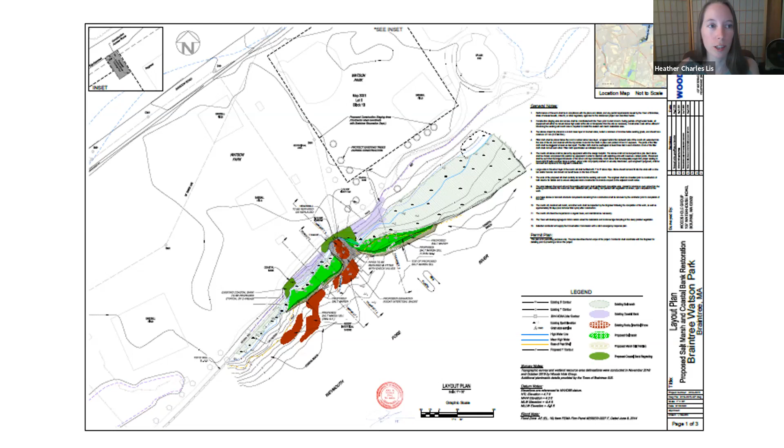I think perhaps we could either go ahead and talk about the decision now, or we could just move forward with the other project. I'm leaning towards continuing with the other project in case anything that comes up during that discussion relates to this earlier project. As the last time, I think there were a couple of comments that sort of overlapped or that triggered our memories to think of something else. So would everyone be okay with moving on to the next discussion? Then we'll come back to a potential decision. Sure. Okay, great. So Elise, if you want to go ahead and go through the changes for the berm project, that would be great.

Great. So there were a few more comments from the commission on this one, so this will take me just a moment longer to go through than it did for the marsh plans. The first comment was that given the hope to remove this berm down the line to allow for sea level rise and salt marsh migration due to climate change to migrate into the park space, that a public education plan should be developed, including markers and signage.

Developing that whole plan is outside of our particular scope right now, but we did add a sentence to the narrative saying that the town is planning to install educational signage to inform park visitors about flood risks, sea level rise, and the long-term plan for the berm removal to encourage salt marsh migration. That was added to the proposed work section of the narrative, so that's page B4. And then note number 8 was added to page 1 of the plans, which states the town will develop signage to inform visitors about flood risk, sea level rise, and long-term plan for berm removal to encourage salt marsh migration. So that was added to both the narrative and the plan.

We had discussed the ability of the park to drain in the event that flooding does overtop the berm during a larger storm. At the August 6th hearing, I mentioned that 1 foot of water covering the entire 18-acre park would take 2 to 2.5 days to drain if the collector pipe was increased from 6 inches as we originally had it designed to 10 inches. After further discussion with the town staff, we actually altered the proposed collector pipe so that rather than feeding into a single one of the existing storm drain pipes from either end of the rain gardens, they actually feed into both of the storm drains, which will make that drainage just a little bit faster again. So the drop inlets are now indicated on the plan, and the detail was revised to indicate a 10-inch collector pipe. So those changes were made.

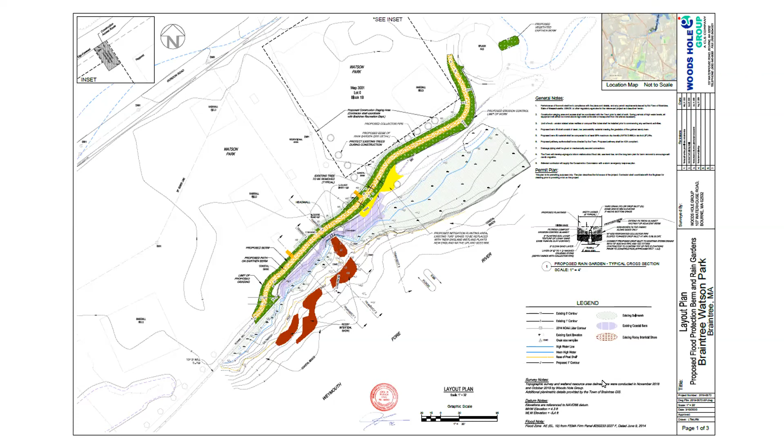Yeah, I think we should talk to them, especially because the area along the wall isn't really part of this project, so they may be taken by surprise if we start kind of taking over the park. Correct. I'd love to do it for that entire area, but in particular for the project area, to talk about maintenance for that. If you wouldn't mind checking with them. We have a standard condition that prohibits pesticides, herbicides, and fertilizers, I think. I don't have it in front of me. There may be some fertilizers allowed, I can't recall offhand, but maybe just check on that, that'd be great.

And Suzanne, the comment about the removal of the berm is noted. That is already in our draft conditions that both you and Robert raised, and I expect that there will be a condition related to removing it. Anyone else from the public wish to comment?

Okay, I had one other comment, which is just that I'm disappointed that shrubs could not be included in the rain garden. I don't fully understand why they would be so difficult to maintain, but I'm respectful of the decision for this project. I don't feel the need to go back and forth with them about it further, but I think it's too bad if there were similar species shrubs. Plenty of other towns maintain shrubs in rain gardens, and maybe it's just that Braintree is not there. I know Braintree is making a lot of fantastic efforts on stormwater. So maybe my comment is more that I hope we get to a place in the future where that sort of maintenance would be feasible.

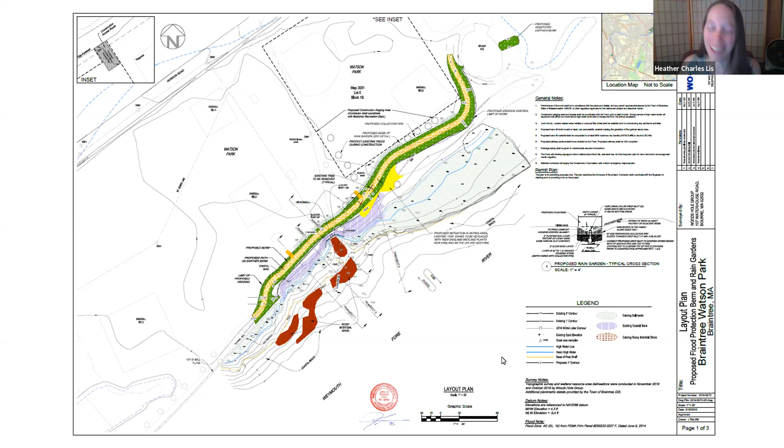Thank you so much. Thank you. Next, we have a public hearing, new hearing for a request for determination of applicability for 131 Messina Woods Drive. The applicant is Kidd, and is the applicant or representative here to talk about the project? Let me just make sure we can hear them. Yes.

Hi, Matt. Yes, can you hear me? Yes, we can. Hi, how are you? Great. Sorry. You can just state your name for the record, and then you can proceed. Just tell us whatever you'd like to about the project.

Sure. So my name is Matt Kidd, and I'm the owner of 131 Messina Woods Drive. The project is that we are looking to put in a pool in the existing lawn area, which falls in the 50-foot range. I actually have our professional wetland scientist with us on this, and so she can go into more of the details on that. But as it relates to any of the specifics around the pool, I'm happy to chime in about that part. So Stacy, are you there? I am. Can you hear me? We can. Yes. Thank you, Stacy.

Okay, great. Thank you. I'm Stacy Minahan. I'm a professional wetland scientist, as Matt noted. And this is a project that actually had been permitted back in 2014. We submitted a request for determination of applicability to put a pool in the backyard and to install a fence. And at the time, the project was begun, but became cost prohibitive. So they did install the fence in the backyard. That was installed in accordance with the conditions. I believe Kelly had come out to inspect the erosion control.

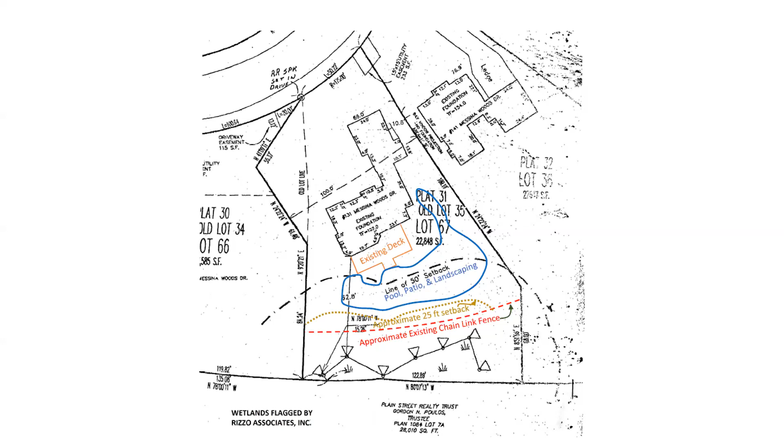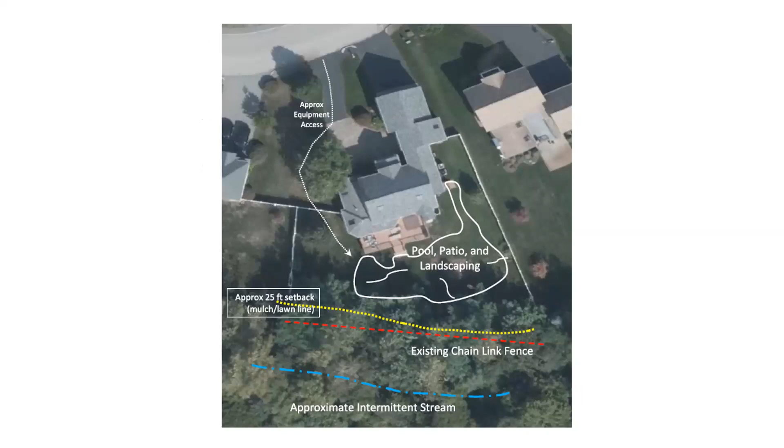It was hand dug. There's essentially an intermittent stream at the rear of their property at the base of a very tall, steep slope. And then at the top of the slope, there's a landscaped area and then the lawn for the property. And so now there's a desire to move forward with the pool project. And unfortunately, the determination has expired since it's been more than 3 years. So we're back before the commission to essentially permit the same project, except that the fence has already been installed. So now it's the pool and the landscaping area within the lawn. I did go out and look at the stream back in 2014, and again this past August in association with the current filing. It's fairly straightforward, I think, but we're happy to answer any questions that you might have.

Okay, great. Thank you to both of you. We have a memo from our staff on this, and there are no issues or questions noted in the memo. Kelly, let us know if you have anything to add. Otherwise, commissioners? No questions here. Okay, anyone else? No, the grass already being there and outside of the 25-foot no disturb area, I don't have any issues beyond the vegetation recommendations that were noted in the memo. Great, thank you, Chris. And thank you, Kim.

And that is my only comment. I wasn't on the commission at the time that the original proposal was approved, but I see no significant issues with the work. But we now do have this buffer zone protection portion of our regulations, and that is in part why you're seeing the suggestion for some native shrubs as mitigation. My only comment would be that recommended condition number 2 says 5 to 6 native shrubs shall be planted, and I would suggest that we change that language to say a minimum of 6 native shrubs. My thought being, not that this would ever happen, I would imagine, but no reason to restrict it to that number if the owner wishes to plant more, but also that it just avoids the ambiguity of the 5 or 6.

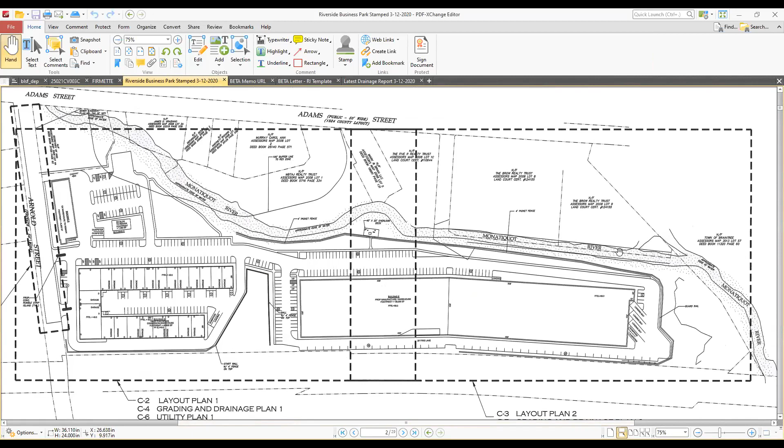And I know some of you that have been on the commission for a while know where we are, what we're talking about. So the Monatiquot River is here, plan north on the upside. Adams Street is up at the top of the page. Arnold Street over here to the left. The existing warehouse or garage is to stay over here, as Attorney Palmucci said. And the other existing building, it looks like a house, but they use it as an office space inside. That's proposed to stay. Then the batch plant is going to be torn down.

And this is the contractor bay that was talked about. It's like a mixed use with garage doors and some office space. And then into the rear of the site is the warehouse space. As Garrett was saying, up here with the parking behind the existing garage area, some public parking, and then access to this walkway. Back here in the middle of the site was what Garrett was talking about with the overlook and some of the picnic tables, to be able to look at the river. That's it overall as far as that goes.

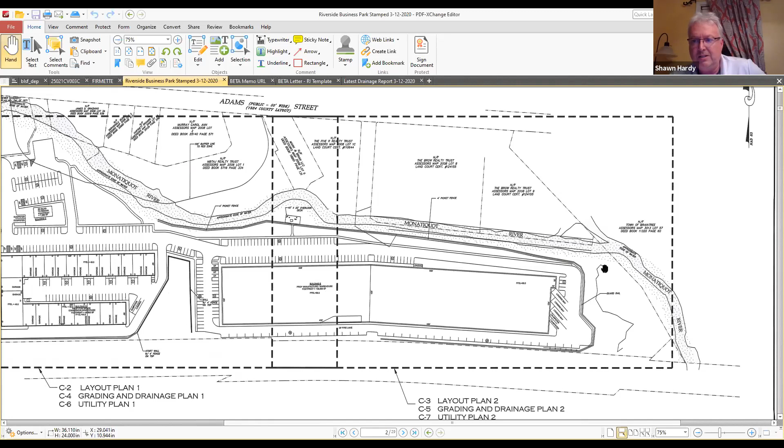Certainly we have grading and drainage plans. It's proposed to collect the surface and the roof runoff and treat it through Stormceptor units and infiltrate, with overflow going to the river. The other, Garrett, I don't have the exact specifics on, but certainly the riverfront restoration is all along this whole area. As you've seen in aerial photos, this place is pretty disturbed. It's got invasives all over the place. So Garrett did a great job with that. I am going to scroll hopefully forward to a grading plan, so bear with me.

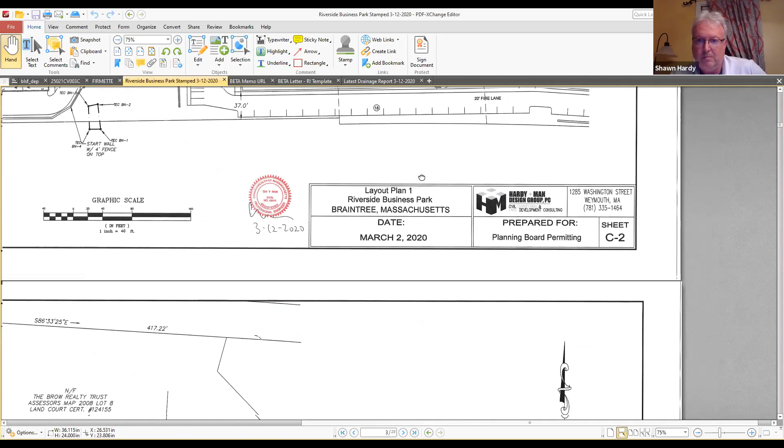So grading and drainage plan, as you all know, this is in the flood zone associated with the Monatiquot. So it had been the subject of a few notices of intent that we've done, back for the original when there was a proposal to tear down the existing batch plant and put in a new state-of-the-art batch plant and the warehouse. The batch plant was never demolished and the new batch plant wasn't constructed, but this garage was. So this was the subject of a more recent notice of intent, after the ANRAD, when we established what the floodplain was and what the wetland line was.

Garrett had filed that and got that approved. Out of that came the realization that while that garage was built, the compensatory flood storage that was required as part of that project was not built. So a notice of intent was filed at that time and showed compensatory storage in order to hopefully bring that into compliance. That also was not constructed because George took ownership of the project. So in this filing, we are proposing similar. Through the ANRAD, we are filling in the flood zone and we are proposing to compensate for that.

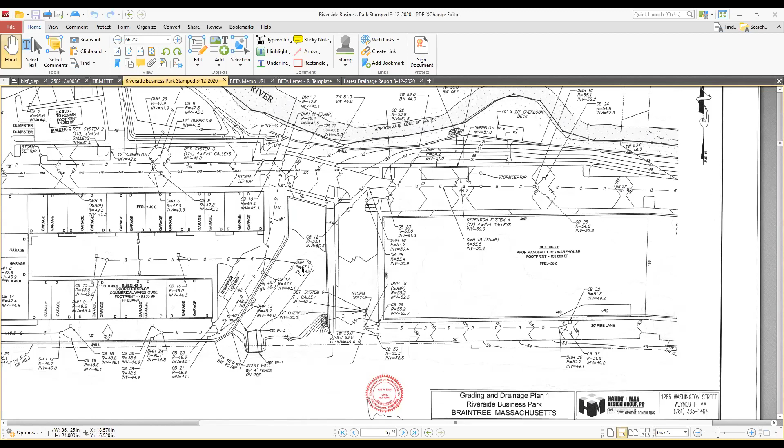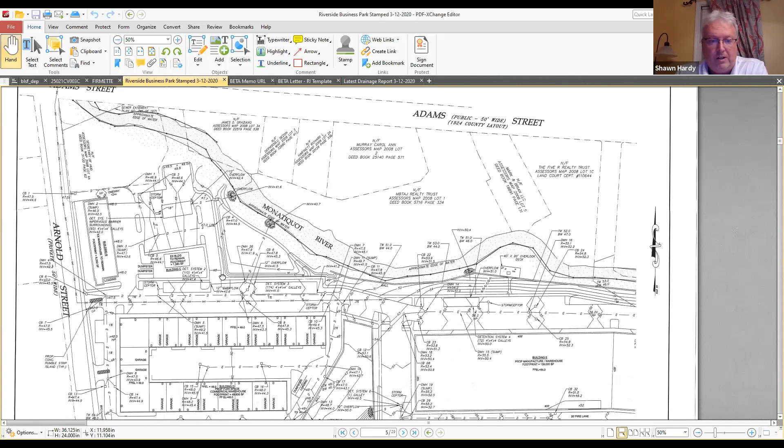One issue is the flood zone or the compensatory storage. And to the point that I know, and Garrett can probably step in again, when we filed this with the DEP, we had brought attention to the fact that there was potentially a conflict between our interpretation and the peer review's interpretation of the compensatory flood storage issue. And we asked them to take special note of that. And when they issued the file number, they did not call that out as being an issue. So they did not comment on that. I don't know whether silence is in agreement with us or not, but I just make note of that.

I will say that we also had a Zoom call and follow-up memo from the peer review, who I know is on here and is probably going to be speaking after us. But I based my compensatory flood storage calculations on what we had done previously through the previous submittals and approvals, as well as guidance on a DEP document from a seminar from 2017 to the Mass Association of Conservation Commissioners.

As you remember, the flood zone is staggered on this. It ranges from way down here to the east of the site at about elevation 41, stays consistent till around the middle. It jumps to elevation 45, and then it graduates up to about 48, where Adams Street meets Arnold Street. My compensatory storage is in this area here, where according to that flood profile is at about approximate base flood elevation 46. I base that on the requirement of the storage being hydraulically connected to the river as well as in the same reach. And if I may share that, I have that as well.

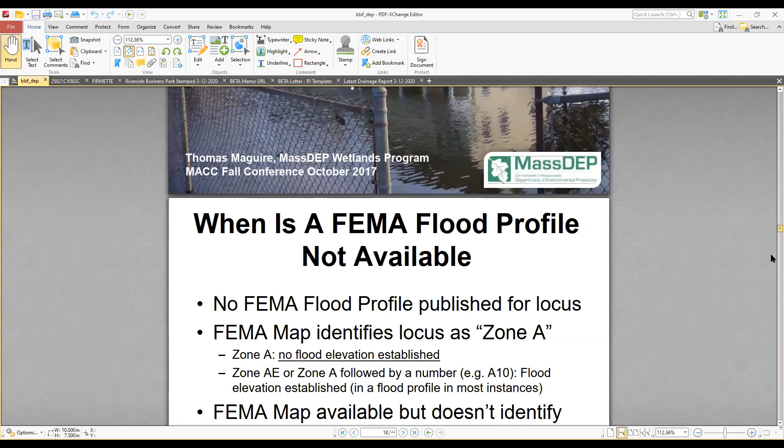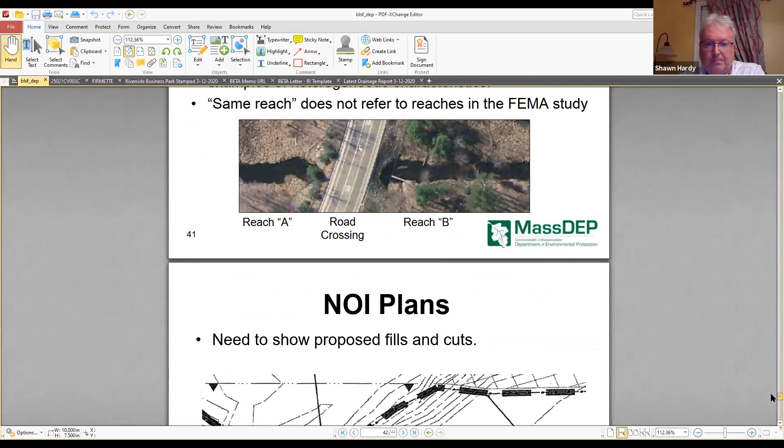This is that study from the Mass DEP. I can scroll up to the cover page so you guys can see what it is. So Tom Maguire, Mass DEP, Wetlands Program, MACC Fall Conference, October 2017, bordering land subject to flooding, how to determine their extent and meet performance standards. There's a lot of how to read flood maps and whatnot. But then down here, for the performance standards, I'm gonna find my page again. 41. There it is.

Okay. So it says same reach. Reach is not defined in the wetlands regulations, but the same reach is a length of stream located between two confluences, two culverts, or two road crossings, provided the characteristics are homogeneous. And they show in the picture here, reach A is what's above this roadway crossing, and reach B is what's below that roadway crossing. They say a uniform cross section, similar elevation, same slope are examples of homogeneous characteristics. Same reach does not refer to reaches in the FEMA study. So that seems to indicate exactly what our site is.

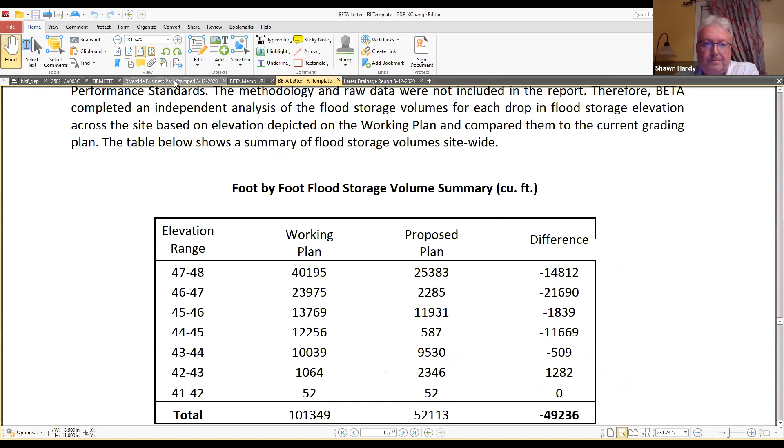Again, I can show other states have similar guidance and similar things. One that was of interest, and I know Rhode Island is not Massachusetts, but they had done the same thing. They went so far as to show that same exact FEMA map and call it out specifically because it was between two roadways and things like that. So

What I'm basically saying is I think overall our plans are ready to be revised, barring major questions from this commission, basically in line with what the peer review had asked as far as the stormwater goes. But we are asking the commission to weigh in on how to interpret this base flood elevation and this compensatory storage, because it's a pretty important issue, both as far as the performance standards go and the environment, but as far as the project goes,

if what the peer review is asking us to do is what the commission directs us to do, then I guess the change will be this area here that is currently proposed as compensatory flood storage will certainly have to be altered. It will come up this direction towards Adams Street. It will further go into an area that has been shown to have contaminated soil. It will probably impact the location of the Riverwalk as well as the public parking, because that is the area that is the 48s and the 47s for elevation.

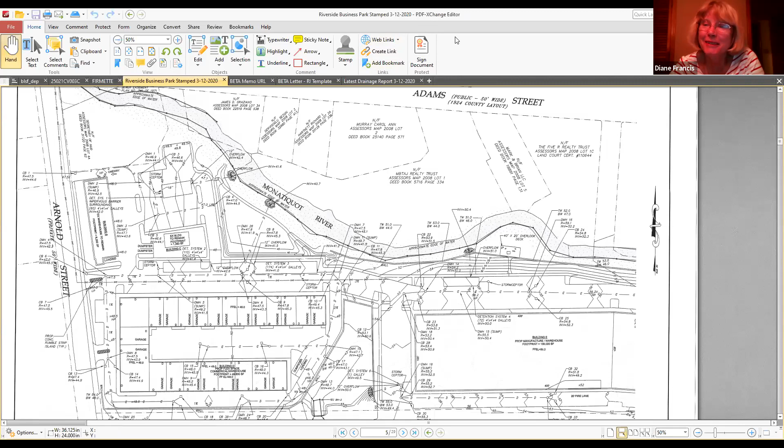So if I may, I have a couple plans we can share to give you a better understanding of our strategies for the site remediations. Stephen, will you let Chi-Man share his screen?

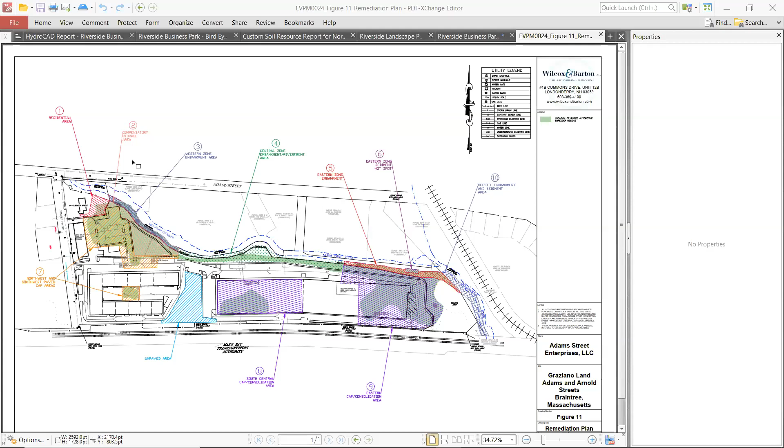So here on the screen, what we have shows, along the bank here, the red hatch area is pretty much the area we have to remediate. It's an area behind the existing two-family house that's going to remain. Our strategy is to try not to disturb that area as much as possible, and not to open up the ground that much. Keep that soil on site, especially close to the bank, and so whatever we come up with in the soil remediations, we are relocating within the site into some consolidation area.

Some of it is going to be capped under the building, where the purple hatch area is. And then the proposed compensatory storage area would be soil cover in compliance with DEP regulations. So if we have to do the so-called compensatory storage area behind the two-family house here, we feel that there will be a lot more disturbance of the soil, and the close proximity to the two-family house, rather than the open area that's commercial use. That's one of the reasons we want to design the compensatory storage area further away from the two-family house.

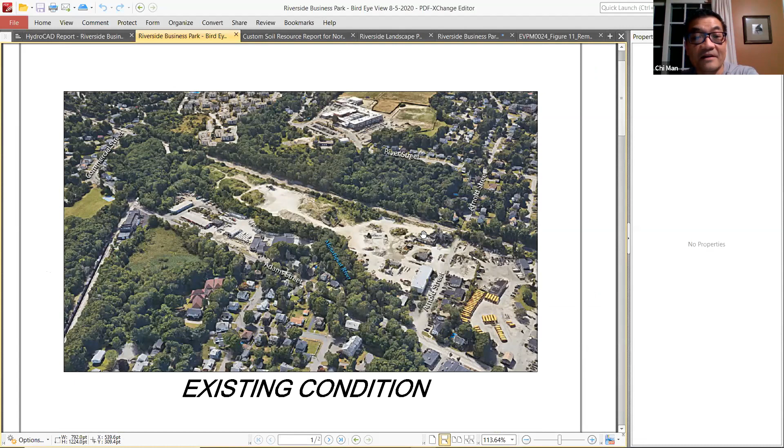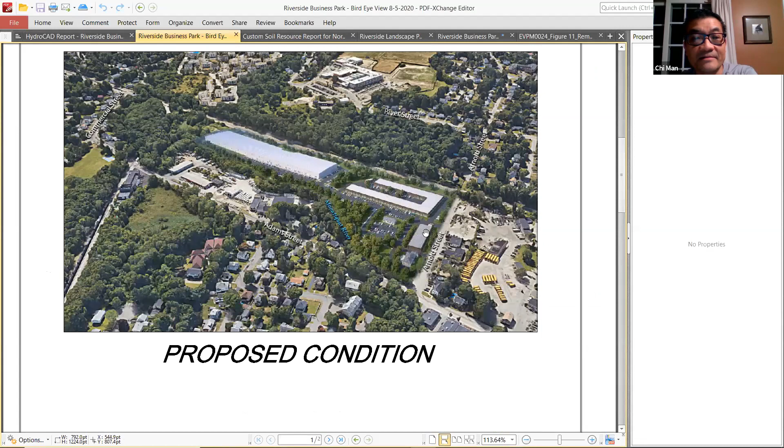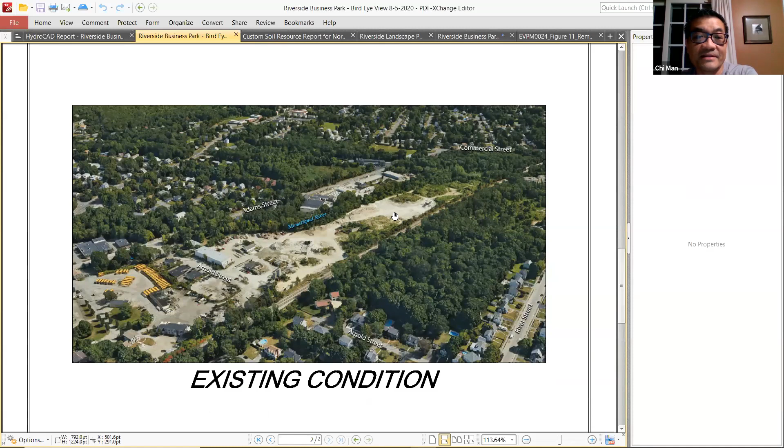Other than that, I have some existing conditions of the site to share. This is how the site looks today. As Garrett described, it's heavily disturbed. And we have a rendering showing what the site would look like with the restoration and landscaping and the new building; it's going to be a 100% improvement. And a different angle looking at the site. If you're not familiar with the site, the existing warehouse, the batch plant here, and pretty much you can see the whole entire site has been disturbed. And this is just another rendering of the proposed conditions of the finished project.

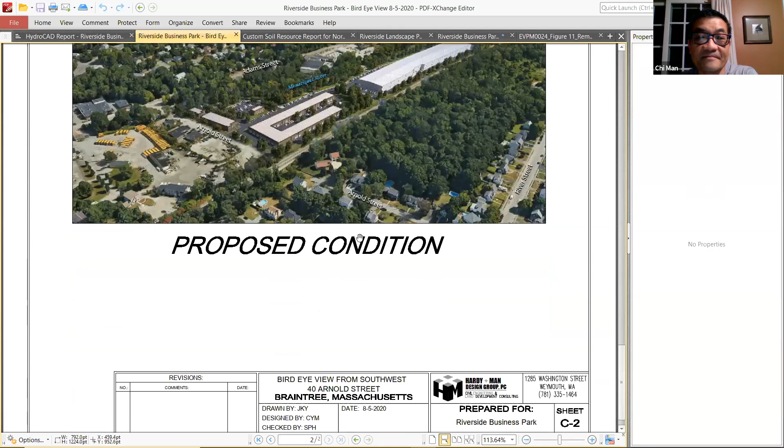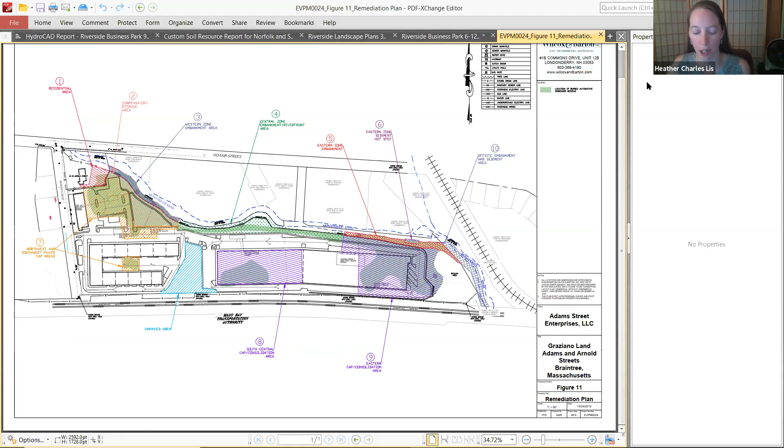So I guess we are open to the commission for any comments or questions. Okay, thank you very much to the team for the comprehensive overview of the project. We appreciate it. I'd like to let commissioners comment now if you'd like to, but I also want to acknowledge that we have the peer review team, or at least some staff who conducted the peer review from Beta, on the line. We could also hear from them first.

Any commissioners have a strong preference? Okay. Vote for the peer reviewer first. Okay, that sounds good to me as well. I just want to make sure. It's been a while without an opportunity to speak, so if you had something burning that you wanted to say now, we'll give you a chance. So I see at least one person from Beta. Yes. Phil Paradis, I'm sorry, I don't know how to say your last name, but if you would like to state your name for the record and share with us whatever you would like to from your review, we would appreciate it.

Excellent. So yes, thanks for the introduction. My name is Phil Paradis with Beta Group. We've been tasked by the Office of Planning and Community Development to review this project on behalf of the town. We developed a peer review letter reviewing the stormwater, the floodplain impacts, and also some environmental considerations relative to the car parts issue. Subsequent to that, as Shawn mentioned, we had a virtual meeting, mostly because we came up with considerably different numbers relative to flood storage and compensation.

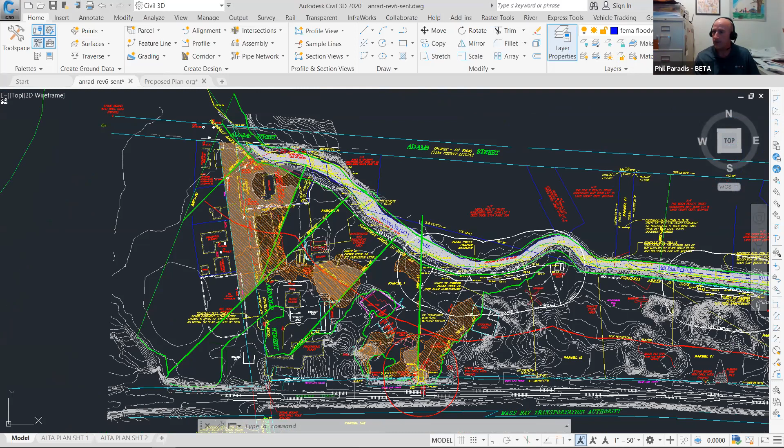All right, so this is a CAD drawing of that plan. Again, the areas that are shaded up here are significant, were filled after 1993 in order to put in the warehouse building here and the road and some of the work associated with the plan.

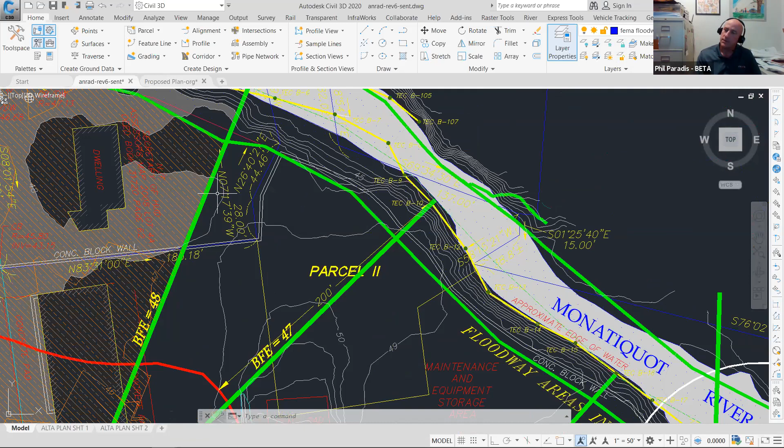There are also spot areas, or no, these are areas that are below the flood elevation, and it's kind of a unique look in that it's stepped. It's not like this is elevation 49 and this is 48, but only this area that's 48 and below was counted as flood storage. So you'll see it stops at the 48 line. So in here, it's above 47 but below 48, and so there's no flood storage here except over here.

And then there's an area in the center of the site. If you've been out there, you remember this area that's kind of low in between the buildings and would be subject to flooding should an event of sizable rainfall occur. And then there's again issues. So anything above 45, if you can see the contour here, 45 is this. So this would be below 45.

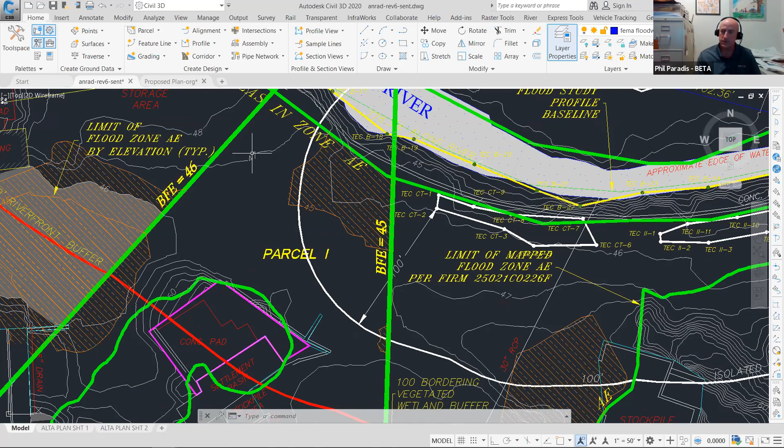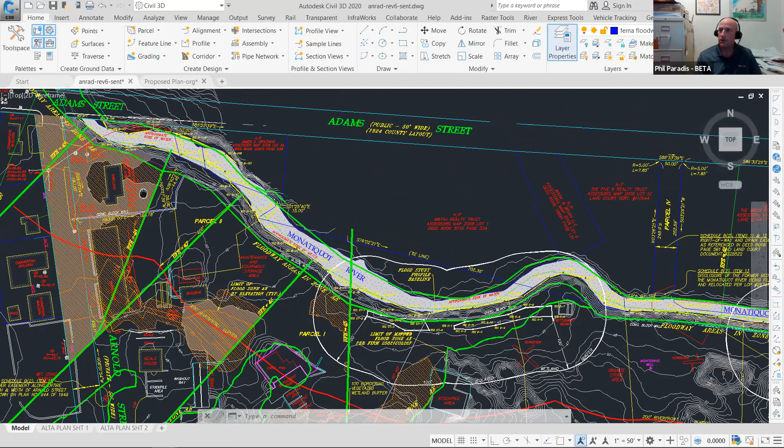This would be the flood storage in this particular reach, and that's how we based our base flood elevation, and you can see again the flood storage area is substantial on the upper end of this project. When you go to look at the proposed, let me see if I can get to the proposed.

So the proposed, can you see that? Oops, what did I just click? I clicked something wrong. All right, where are we? No, that's the old one. Let me get back there. Let me close some of these other ones. What are you seeing now? Are you seeing this plan? We're seeing that it says you've started screen sharing, so perhaps it's just taking a moment. Oh, okay. Or you might still have to choose the screen. Sometimes that's the waiting thing.

All right, let me stop sharing again. It's been working up to this point. It's not showing the right plan though. Let me move this over here. I have two screens. So we're still seeing that you've started screen sharing. All right, now we're not seeing you at all. CAD's locked up. Let me try one other thing. I'll see if I can open the plans.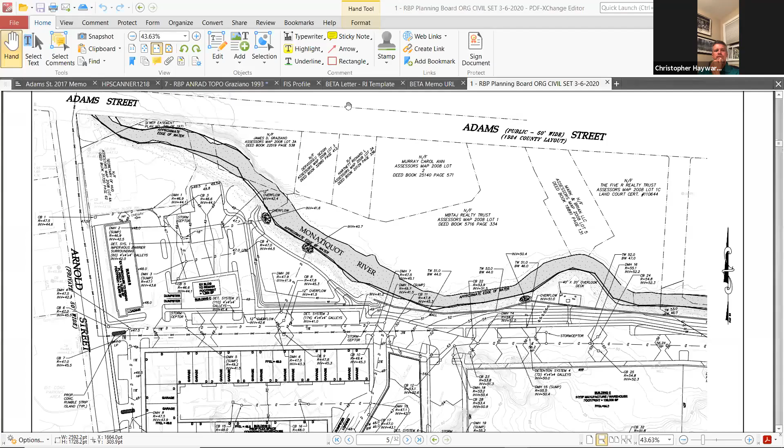By putting the compensation down here on the lower reach, it doesn't really help the flooding up on and across Adams Street. And I understand what Shawn's saying in terms of the reaches. Typically, the culverts or stream crossings are what control the flood elevation. However, as you can see, the 100-year flood drops significantly in a fairly short distance for floodway standards. So this is not really homogeneous.

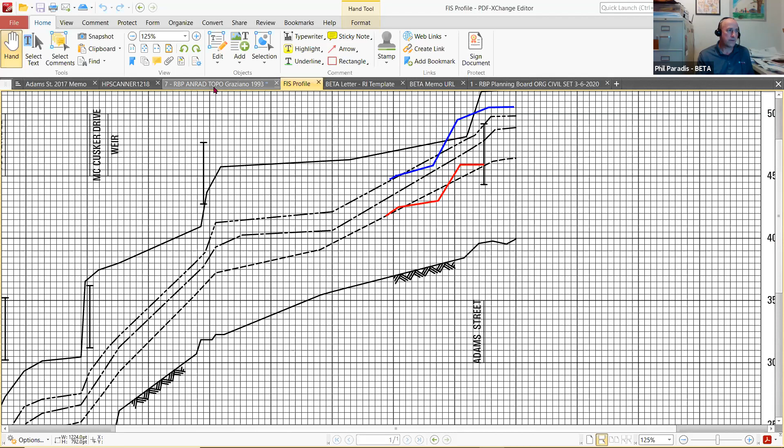to reach impact. We feel that in order for the site to be brought to equilibrium, the flood compensation for this particular area needs to be in this area. And subsequently, as you go down, it needs to be on a foot by foot basis in that particular area because there is such a difference in gradient relative to the floodplain.

If I may, can I? Thank you very much. Can I respond a bit, Madam Chairman? Yes, Shawn, if you want to respond, that's fine. This issue seems significant enough that it's worth talking about it and making a decision tonight.

A couple things, and I've said this a bunch of times: anyone who's seen how this area floods, and that profile with the red and blue lines shown a moment ago indicates it. This area floods because the water cannot get under Adams Street. It comes over the bridge, down Arnold Street and into this site. We talked about this when we filed and got an ANRAD, and that plan with those shaded areas was the basis of the ANRAD.

That came through a lot of meetings with the town engineer at the time, Kelly and myself, and even the profile showed it. The reason that flood profile drops significantly after Adams Street is because Adams Street is the reason that area floods. It can't make it through that culvert. That is a further example of what I showed on that DEP document of what is considered a reach.

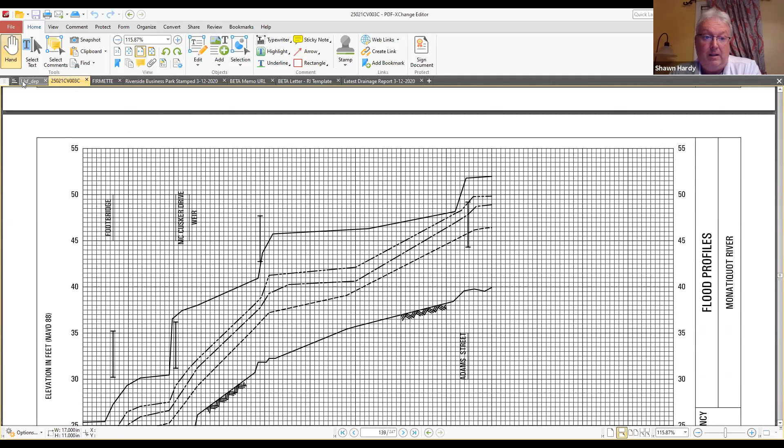And again, this document, the MACC, this is to the Association of Conservation Commissioners. This is telling people in your situations how they're supposed to interpret things and how they're supposed to enforce and make sure the performance standards are being met. Same reach: a length of stream located between two confluences, two culverts, or two road crossings. And here's the picture, reach A, and what divides it is a road crossing, and reach B. Same reach does not refer to reaches in the FEMA study.

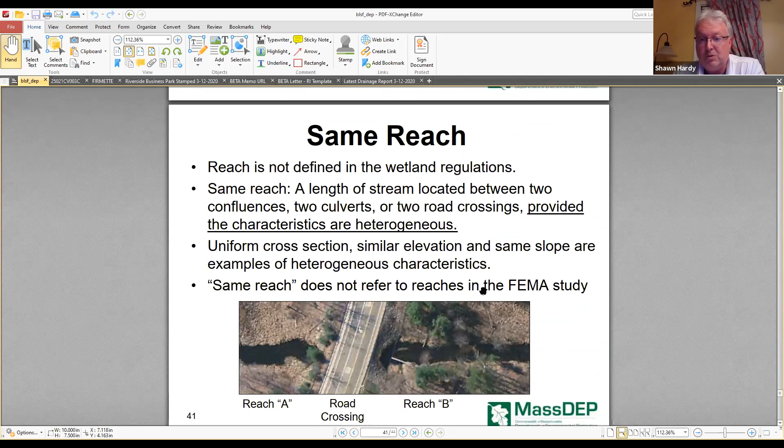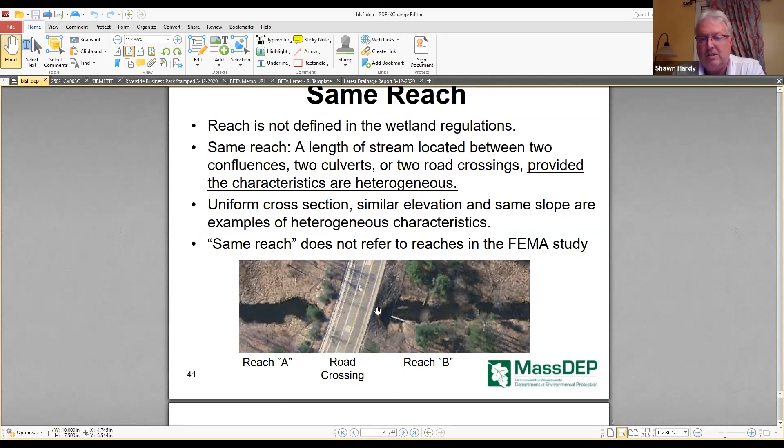So not only does it say what I have shown or what I interpret seems to be correct, it says a reach is not between elevation 45 and 46 and 46 and 47. It gives a picture that says my interpretation meets this document, and then it goes so far as to say that it does not mean those separations between those base flood elevations that were previously discussed. It specifically says not refer to reaches in the FEMA study.

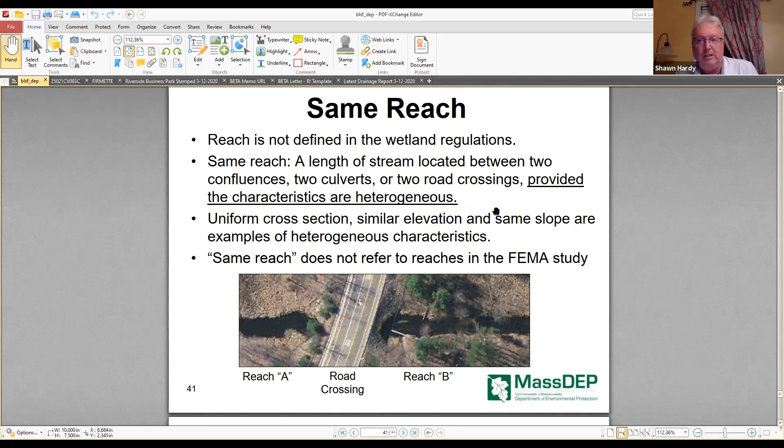So between that and what has been previously approved by this commission, and again, you guys I know have history, you've certainly been out here probably, and anyone with DPW, and I know Kelly's been around long enough to know when this thing floods, we've seen it. It comes over Adams Street, it comes down Arnold Street, it swoops through the property of Graziano, and then it gets back as fast as it can to the river.

So that's why I feel what we've shown is both consistent with DEP, the only guidance document I could find, but it's also consistent with what has been previously approved, as well as what anyone who's witnessed flooding knows of how this occurs. So that's why I'm asking your guidance, but I'm strongly suggesting that what we have shown meets the criteria. Thank you very much, Shawn.

I'd like to let the commission discuss this issue now. However, Phil, would you mind just very briefly telling us what the two colored lines were on the flood profile that you showed us, just to clarify, since that question came up? So, yes, let me share this.

So the challenge is it's not easy to depict it on a profile. But what Shawn said is the truth in terms of this river floodway, is that it comes over the bridge, comes over the road, and wants to get back into the river. However, because they've filled this upper reach, there's less opportunity for the floodway to spread out and then get back into the river at this elevation. So filling this up here further restricts the flow from this upgradient area.

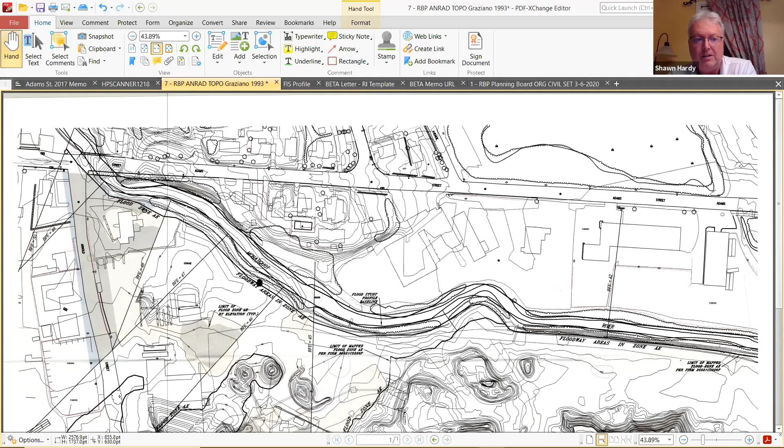That plan is not showing what has been filled. That's the basis. Excuse me. So I think maybe at this point, obviously there's different opinions. That's not even an opinion. He's showing the plan. I'm talking about general hydrologic and river characteristics. Yeah, but you pointed to the ANRAD plan and said that area has been filled. It hasn't been filled. That plan that you're showing is the basis of the ANRAD plan that shows what is the flood zone. Yeah, and anything that's been filled, this is filled now. Okay, that may or may not be.

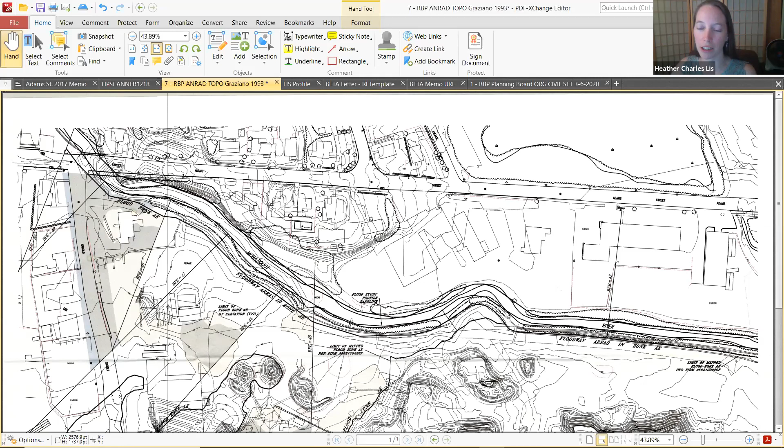I'm going to actually cut in here at this point. I really appreciate all the effort on the whole project, but this specific topic, I know this is not easy, and I know there are differing opinions. I think the commission should talk about it and see if we can come to some agreement ourselves on how we feel it makes sense to move forward. There's been fill all over the site, but I recognize that as the ANRAD plan, and I can comment on that as well because I was on the commission when that was approved. But I just want to open it to the Conservation Commission. If anyone would like to comment, maybe we could keep our comments initially focused on the resource areas and in particular this floodplain issue, and then go from there.

Does anyone want to dive in first, or do you want me to state my opinion? I'll step in. Okay, Peter. I'm not as familiar with this site, but from the plans, is all the project site located within a base flood elevation flood zone? The short answer is no, but I'll let Shawn or somebody from the team answer the question. Well, it seems that the limit of the floodplain is not clearly shown in the plan, and that definitely has to be addressed. My next question would be, what is the limit of the floodway on the site? I don't believe that that's shown on the plan either, but Shawn, I'll let you respond.

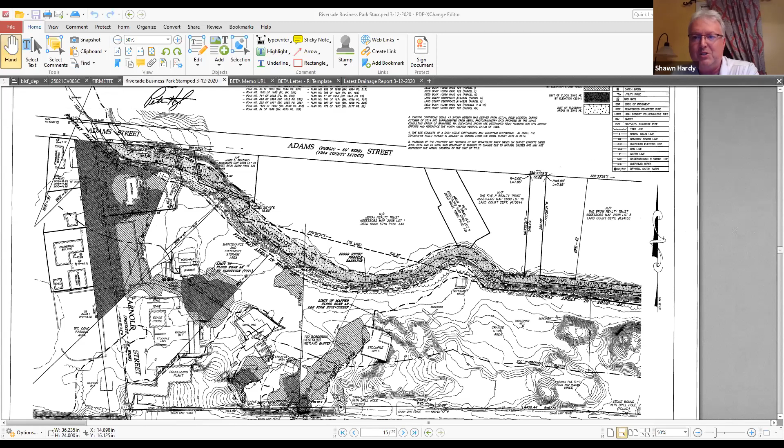So again, this ANRAD plan went through 6 revisions. These lines with these base flood elevations on them are what FEMA has shaded on their flood map. But these shaded areas are the only areas on this site that fall below those base flood elevations. Therefore, they are the only areas that are in an area subject to flooding.

I'm going to provide some comment here. Peter, if you're surprised by what this floodplain looks like, that's perfectly understandable. It's a very strange looking floodplain. I was on the commission when this ANRAD came through, and it was very tricky. It doesn't follow the mapped FEMA floodplain, but that was intentional. We requested that the floodplain should be shown based on actual surveyed elevations. But that was very complicated on this site because it is a site where stockpiles and materials are constantly being moved and graded and regraded.

And so, past plans were looked at. There was a lot of other data that came into play, and it did get very complicated. But I concur that this is what was determined as being the floodplain. Now, that ORAD issued by the commission has expired earlier this spring. So in theory, that could be revisited. I will say that I don't have an issue with how the floodplain or the other resource areas are being portrayed. Kelly and Garrett have reviewed them together, and she's comfortable with it.

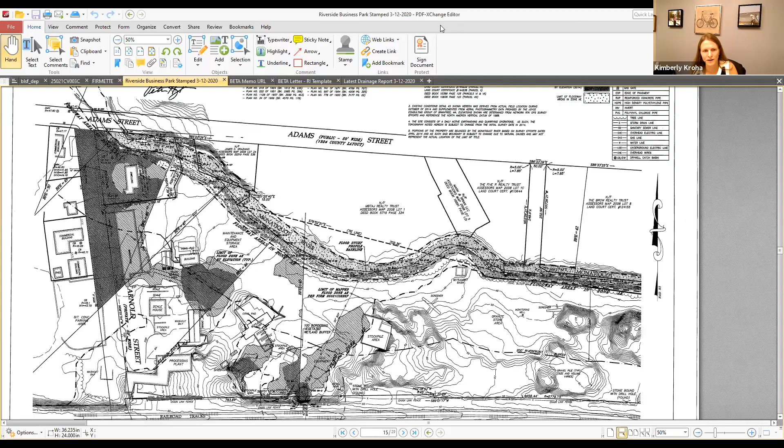I had a couple questions. So I understand from some of the information that there was flood storage that was supposed to be put in 2005, or I shouldn't say it that way, and then the NOI in 2017 called for it, and it wasn't included, and that appears to be the problem area. And I was just wondering if somebody could point out where that was supposed to go, and if that's a location that's still a possibility, or is that something changed with that aspect?

There's also, sort of together with that question, the house that's up above, what is it, Building B, and whether or not, it looks to me like that's not part of the property, but there seems to be a lot of talk about the house and the land there. And so I'm not sure how that connects with what's being proposed here, or if it was part of the property previously, and that's why there's a lot of discussion about it.

I can address the member's question about the two-family house. It's all commonly owned. They were all separate parcels. They still are. The entire site has been combined, but it was originally many separate parcels. The house is not part of the proposal in terms of everything that we submitted before the bodies.

However, if the interpretation of the commission is that the compensatory storage needs to be done in conformance with the peer review's opinion, we're going to need to add in that particular property, because we would need to grade that area. So we would have to amend our applications to include that. But it was cleaner if we didn't include that property with everything else that was going on. That's the short answer as to why it's not in there, but why it's being discussed.

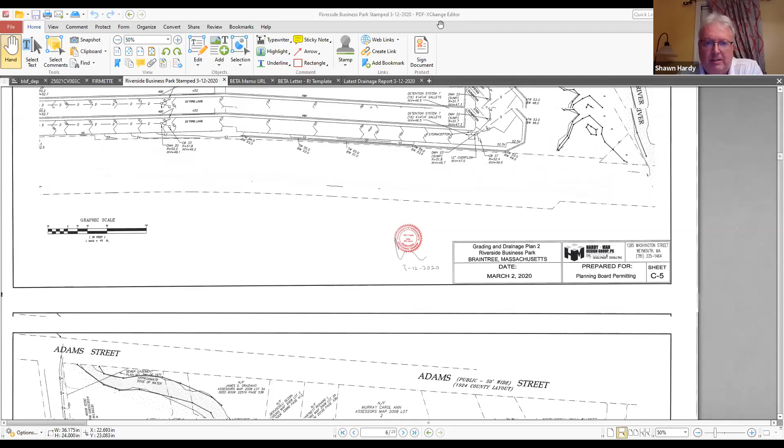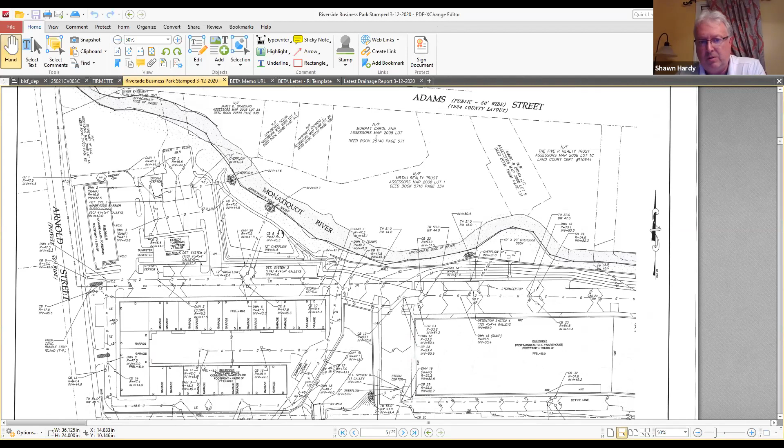So I'm proposing in this general area right here behind this existing building. There is a lot more fill that's proposed under this circumstance than what was done by building this garage, but it was generally in this same area right here, which is why I redid what I did this time around. This existing house, I'll call it a house, it's not a house, it's an office building, has a high parking area behind it, and the ground slopes back down as you come down into the site.

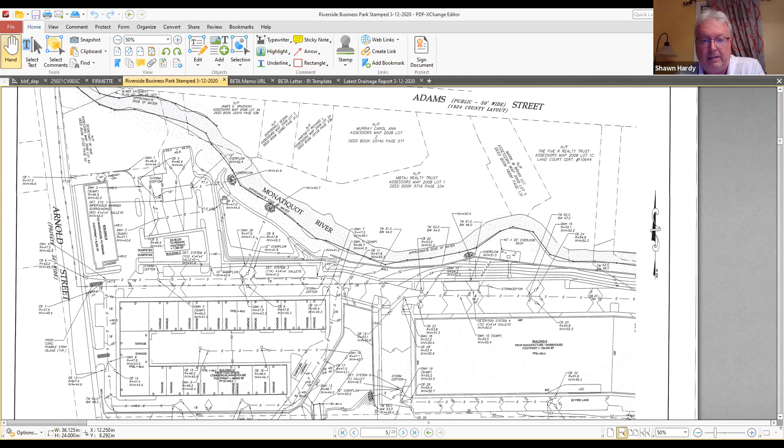So this is the area that under the last notice of intent was proposed to be excavated for compensatory storage. And that's why I took that and I expanded that same area and did the same thing this time.

Okay, one other thing. I was wondering if you could submit the PDF report of that seminar you attended to the commission. I would like to look through that. I forwarded that to staff a few weeks ago. Okay, I wasn't aware. Sorry. I can do it again, certainly. Well, if staff has it, then it shouldn't be a problem.

The other thing, the one comment that you made, you talk about the existing flooding at the upstream culvert. You say it swoops down Arnold Street and then will come across the Graziano property. Isn't that in the area where you're proposing your buildings, that you're going to have flooding on this road that's now going to go to Arnold and then cross your site? It doesn't seem like a good design, and we'll still have impacts to adjacent properties. That's why we look at trying to do the compensation in the areas where it's most needed.

Well, some of the neighbors might be on here. Part of the reason it came down Arnold Street the last few times is because there is a drainage system in Arnold Street that goes in on my client's property that was not really known to anybody other than a few people, and it had been broken, and it was the subject of a previous, I believe, RDA. Garrett can confirm that. Yes. To repair that pipe that goes through there, and that relieves a lot of that. And as part of this proposal, we are also proposing to further upgrade the drainage in Arnold Street.

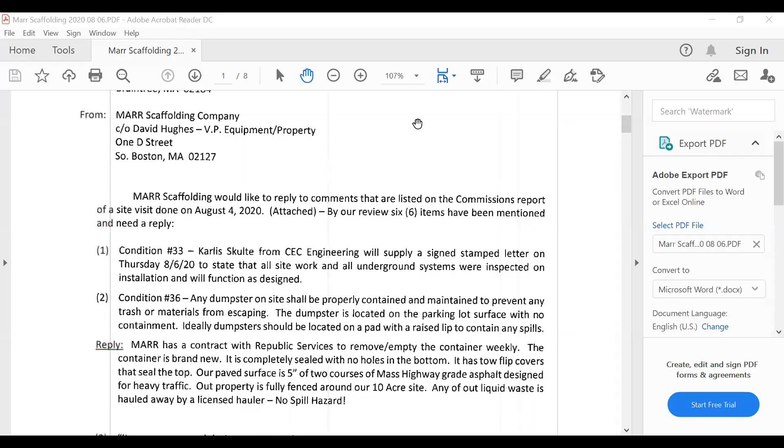At home. I mean, I don't think I should read the whole thing. This is getting complicated. I feel like it's going to get too complicated. Yeah. Almost just as soon continue it at that point. Yeah, well, here's the letter if I'm sharing my screen successfully. We haven't seen it yet. No. See it now? We do see it now. Is this helpful? Is this reasonable to go through it in this manner?

Sure. Okay, so Kelly's comments are numbered 1, 2, etc. So the first one, that was done, correct, Kelly? That's been resolved? Yes. Stamp letter. Okay, so that's all set. Comment number 2 from Kelly was about condition 36. The dumpster should be properly contained and maintained. And the response was that it's being maintained and it's new, so it doesn't have any issues. And it's fenced, no spill hazard, but spills could of course go to the catch basins.

Anyway, my input on it was I'd like to see if they could change it now to either add a raised lip or some sort of containment around it. It's doable. You can do a precast concrete lip. Yeah. It didn't seem like a completely unreasonable request to have them do now. Okay. Want to move on to 3?

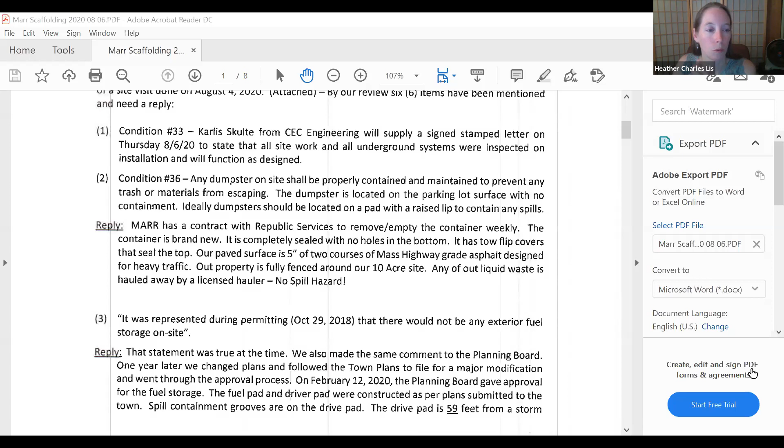All right. So the third one was that it was represented during permitting that there would not be any exterior fuel storage on site, which they agreed was true. Apparently they changed the plans and went back to the planning board to get the changes approved, but they obviously did not come back to conservation to have the plans changed. And so the response is that there's a drive pad that has spill containment grooves, and that drive pad is 59 feet from a storm drain, and the fuel island will have a spill containment kit. And the storm drain is equipped with a drain hood to prevent any oil flow out of that basin, and there's rubber mats, etc., in the spill kit.

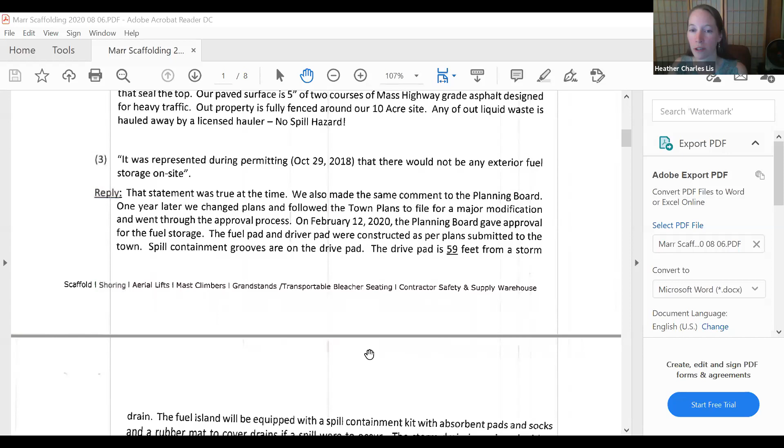Any thoughts on that? So Kelly, you're suggesting that at this point it should ideally be covered. Yes. And have the spill containment grooves closer to, like around the actual storage itself, not on the drive pad. Right, yeah. Correct? Okay. Do commissioners agree with that recommendation? Yes. Okay. I also agree, particularly where we're sort of allowing something that, if this had come to us saying we do in fact need exterior fuel storage, we probably would have conditioned those things, would be my guess.

Not, yeah, I don't know. I heard a yes. Peter, any thoughts? No, I'm okay. Sorry to put you on the spot. No, I'm okay. Okay. And if it's just too difficult, they could come back and express that, but at least they'll know that we still feel that they should do it.

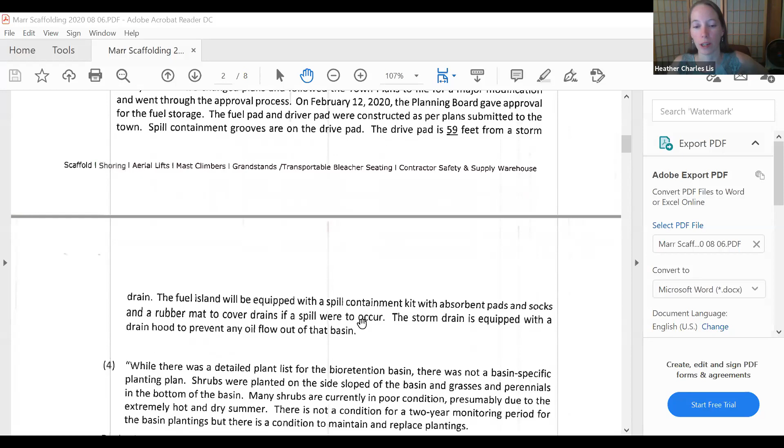Point 4 was, I won't read the whole thing, but basically some of the shrubs were having a hard time. We wanted to see if there needed to be some replantings, and there needed to be time to see if the plants survive the season. We're going to have to wait till October now anyways, and Kelly's initial recommendation was to wait until October or November.

So I don't think anything really changes on that one. And then 5 had to do with an area that was being mowed that was not supposed to be mowed because it was meant to be for connectivity. I clearly remember that during the permitting process. That was one of the big pros of making these basins, which are replacing an isolated wetland. So I'd like to confirm that it's not being done. So I don't really think we need to take much action.

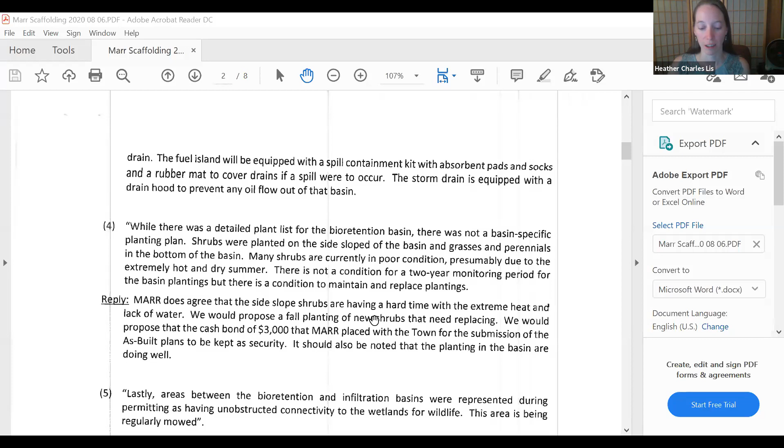Is that enough information to relay back, Kelly? Yep. All right, so do we need a motion to continue this? I think we don't, right? Or maybe we should to be safe. I'll make a motion to continue the request for certificate of compliance for DEP 8-674, 201 Commerce Drive, to our next meeting on October 1st. Is there a second? Commissioner Hayward? Second. Commissioner Crowe? Aye. Commissioner Francis? Aye. And Commissioner Williams? Aye.

Okay, 5-0-0. Next, request for certificate of compliance for DEP 8-671, 50 Christina Drive. The applicant was Chaplin. And this one, Kelly is recommending that we issue the certificate. Anything further to add, Kelly, or anybody have any questions or comments? Nope. Hearing nothing, are there any surviving conditions? There is one about the area beyond the markers, maintained in a natural state. Okay, so then I would make a motion to issue a complete certificate of compliance with the remaining condition for DEP 8-671, 50 Christina Drive.

Is there a second? Commissioner Hayward? Second. Commissioner Crowe? Aye. Commissioner Francis? Aye. And Commissioner Williams? Aye. Okay, it's unanimous again, 5-0-0. And then we have a number of requests for extensions. I did not see the memo on this. I apologize. Can you just get us up to speed, Kelly? Yeah, I think it came late in the day. I'm so sorry, I didn't see it.